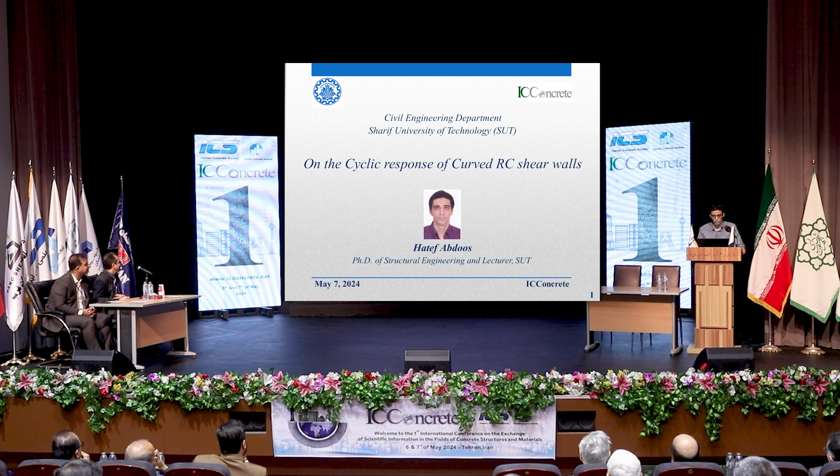Hello everyone, I am Hatef Abdoos, PhD and lecturer at the Civil Engineering Department, Sharif University of Technology. It's my honor to share my findings and current research on curved RC shear walls.

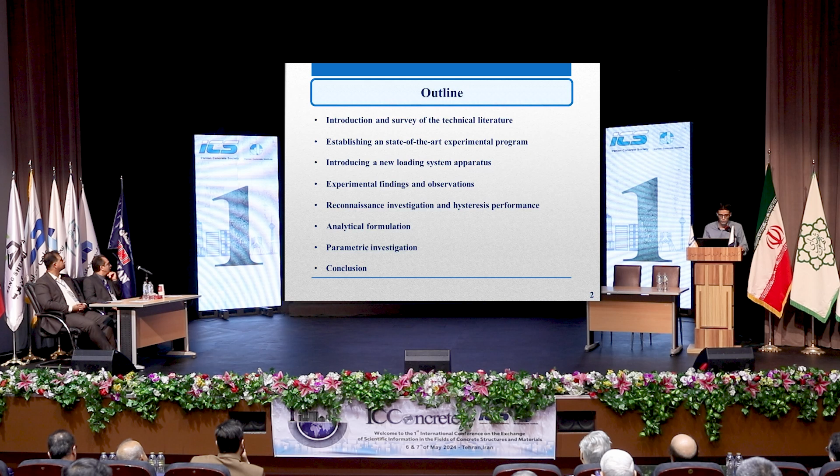The outline includes: first, a glance at the current technical literature; establishing a state-of-the-art experimental program to assess the cyclic response of curved RC shear walls; introducing a novel loading system apparatus capable of accommodating the in-plane and out-of-plane motion of the specimen; experimental findings and observations; a reconnaissance investigation on the damage evolution process and hysteresis performance of the tested curved RC shear wall; analytical formulation and parametric investigation; and conclusion.

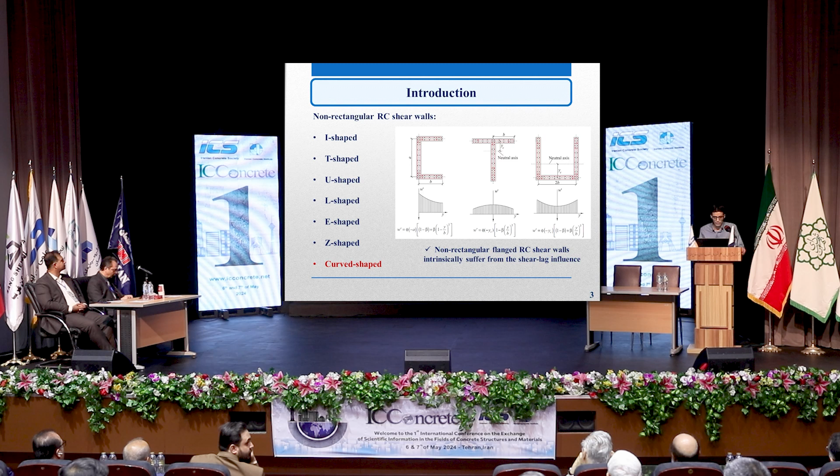Non-rectangular RC shear walls can generally be cataloged as I, T, U, L, E, and Z-shaped structures. This type of structure intrinsically suffers from the shear lag influence, and by adopting a curved shape and eliminating the web-flange intersection, the shear lag effect will not be a major concern.

In design practice, curved structural elements are generally employed to fulfill some of the architectural and aesthetic requirements. However, due to the complexity existing in the construction, casting, and testing process of curved structural elements, the structural behavior of such elements remains essentially unknown.

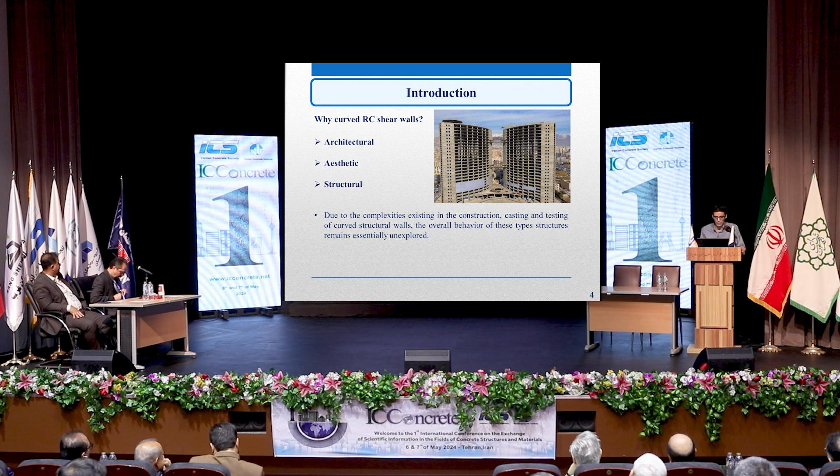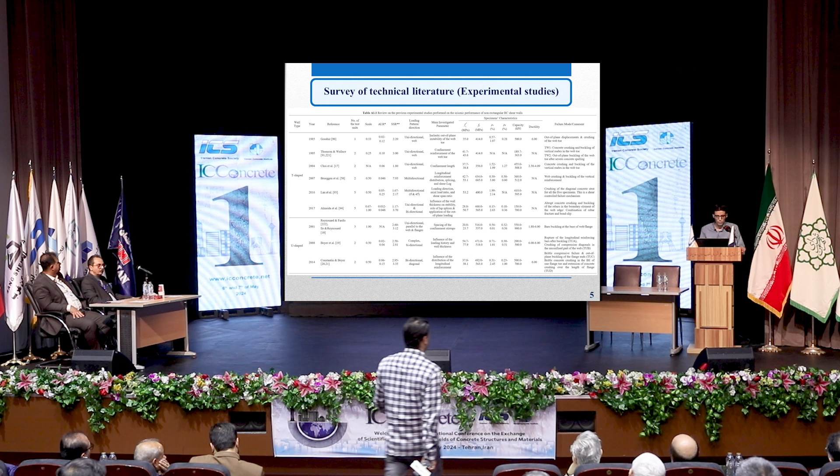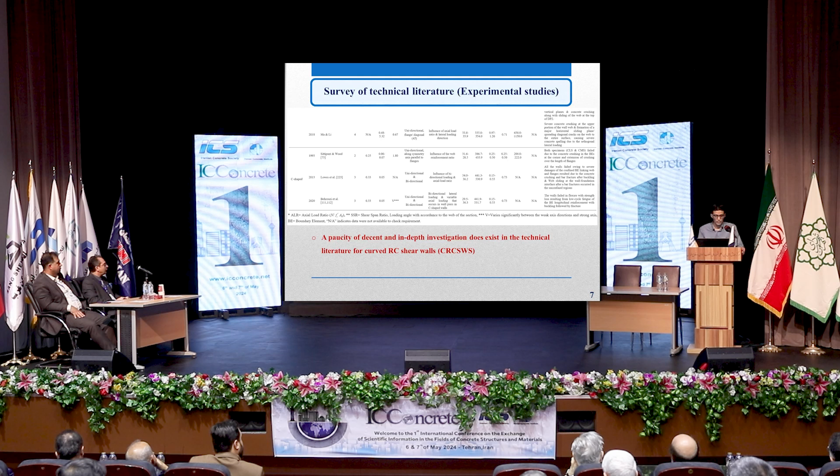A glance at the current technical literature indicates a wealth of experimental, analytical, and numerical investigations on the cyclic response of non-rectangular RC shear walls. However, a paucity of decent and in-depth investigation obviously exists in the technical research to assess the cyclic and structural performance of curved RC shear walls.

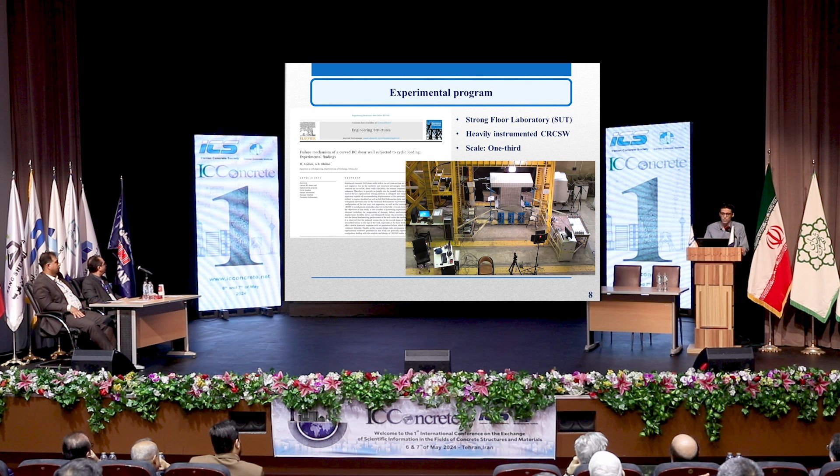In this regard, an experimental testing program has been designed and constructed at Sharif University of Technology. A heavily instrumented curved RC shear wall at 1/3 scale has been designed, constructed, and pseudo-statically tested under cyclic loading. The main assumptions made in the experimental study include no axial loading, no boundary element, and applying the lateral loading to the centroid of the cross-section.

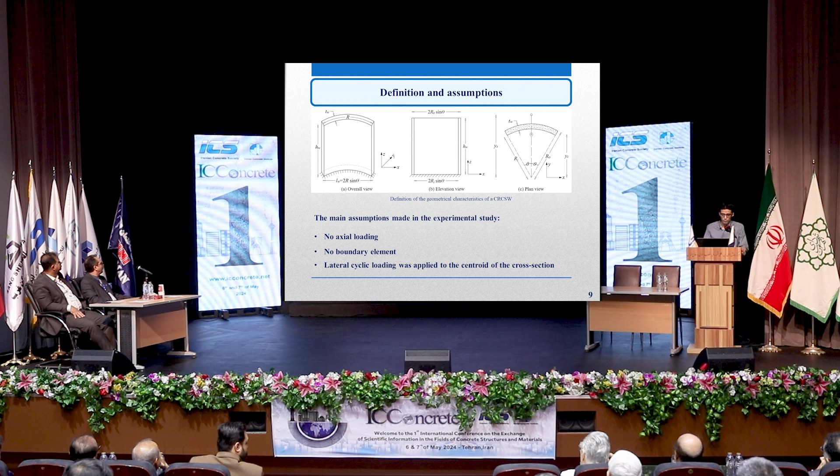As shown in the plan view of the curved cross-section, an offset exists between the shear center and centroid of the section. Hence, a torsional moment will be introduced in the section that should be considered in the loading apparatus system.

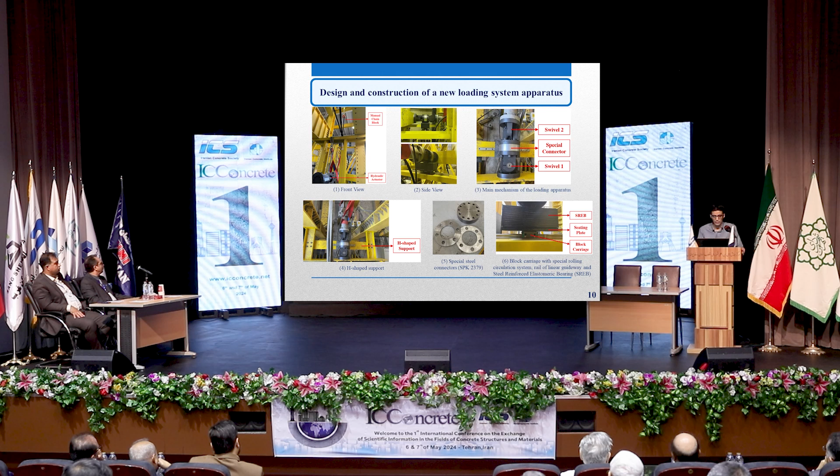In order to accommodate the out-of-plane motion of the specimen, a new loading system apparatus has been designed. The main mechanism of the loading system includes two interconnected swivels connected through special connectors, rested on steel-reinforced elastomeric bearings, which include a block carriage with a special rolling system and a linear guideway to freely move in order to provide out-of-plane motion.

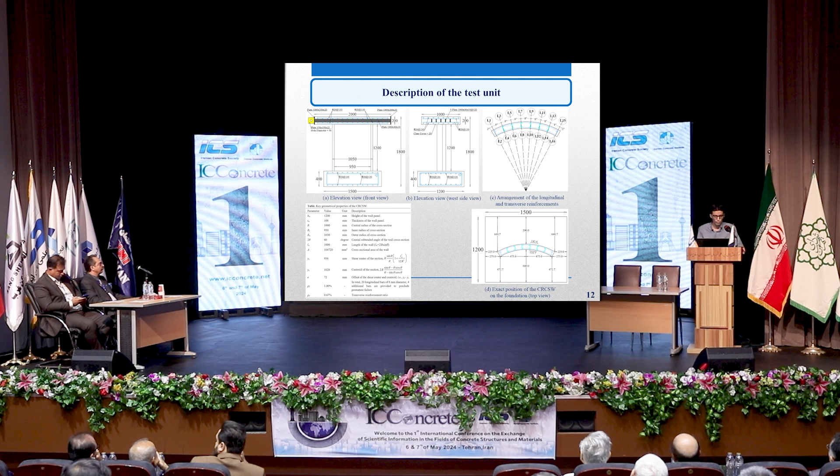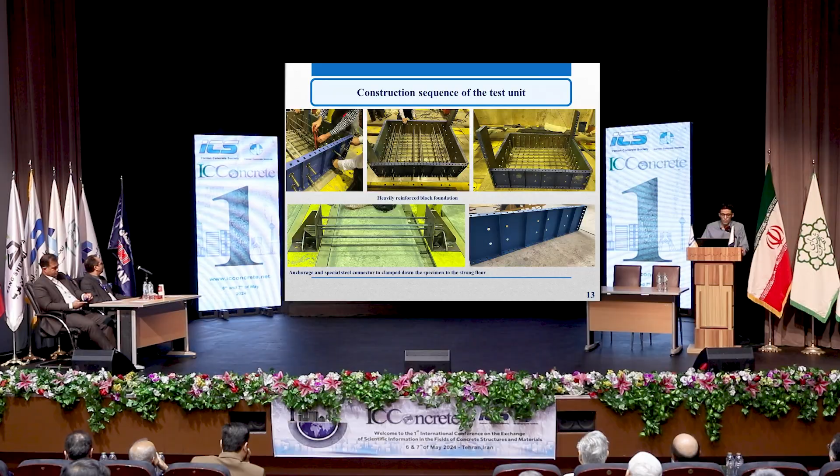The construction sequence of the test unit is provided in the following slide: a heavily reinforced block foundation, anchorage, and a special connector are considered to clamp down the specimen to the strong floor.

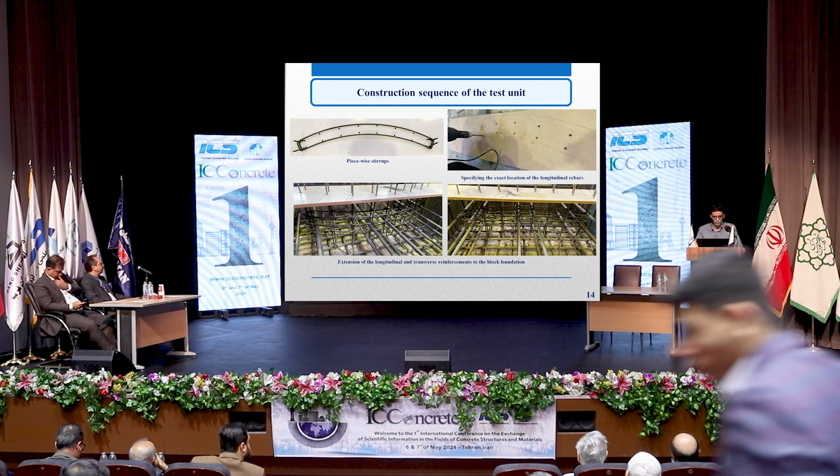The exact location of the longitudinal rebar is specified, and at the first place, piecewise stirrups are used due to the spatial cross-section of the section. Extension of the longitudinal and transverse reinforcement to the block foundation, piecewise formwork, cross sizing, and accurate leveling of the inner and outer formwork.

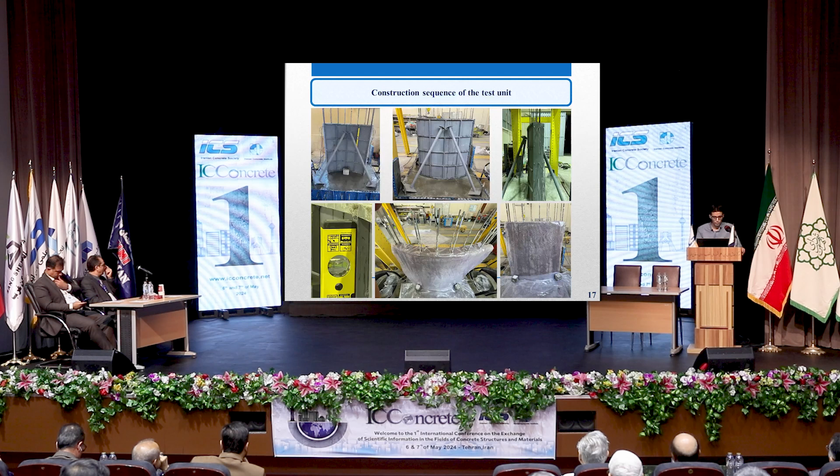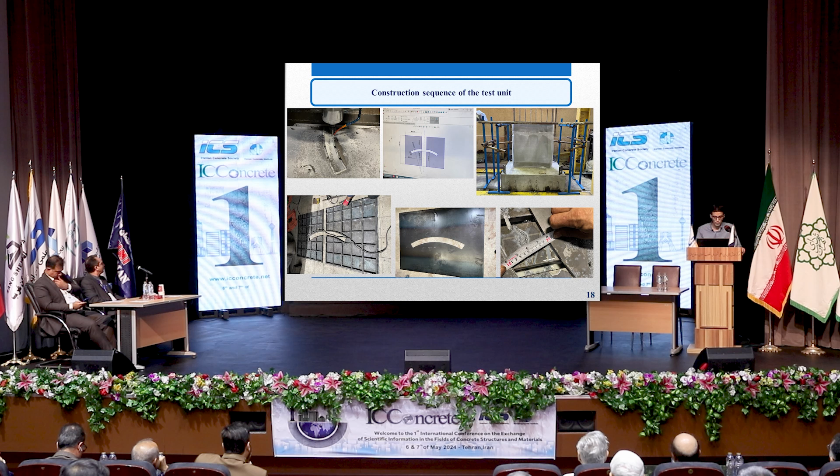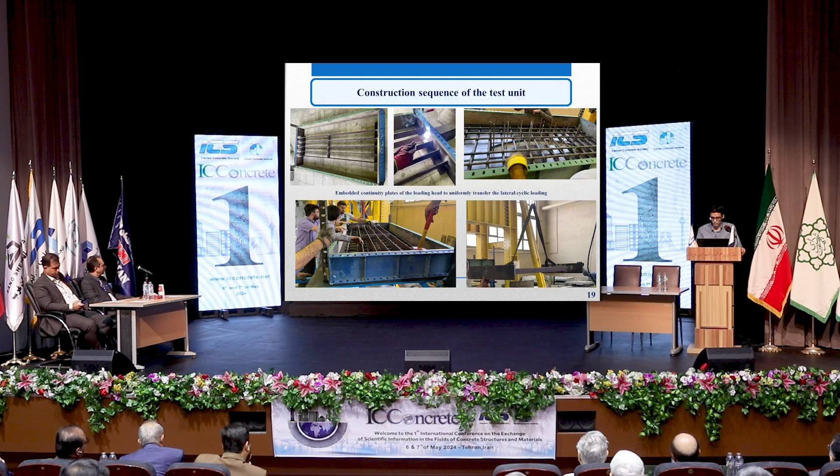Formwork of the wall panel, pouring concrete and curing of the wall panel. A CNC machine is used to accurately specify the exact location of the wall section on the formwork of the loading head. Five continuity plates are employed in order to uniformly transfer the applied cyclic loading. This is the final stage of the construction.

The mechanical properties of the material were considered using the UTM test. As the thickness of the wall cross-section was essentially small, that is 10 centimeters, a self-compacting concrete with target strength of 45 megapascals was employed, and the J-ring test of the self-compacting concrete is shown in this slide.

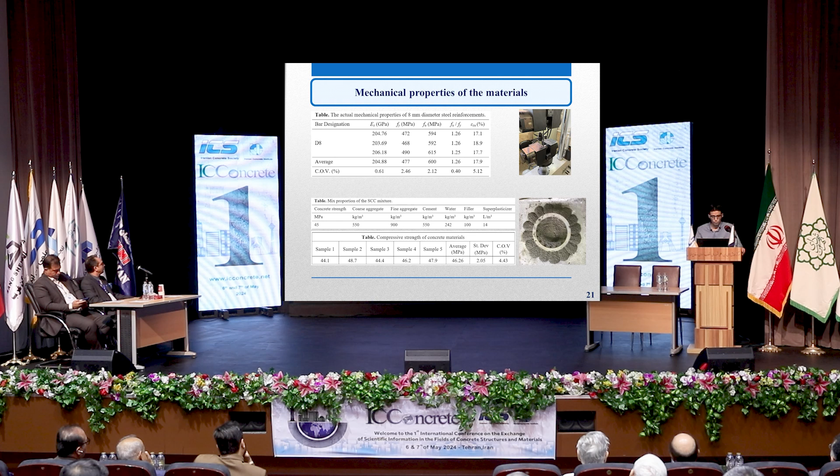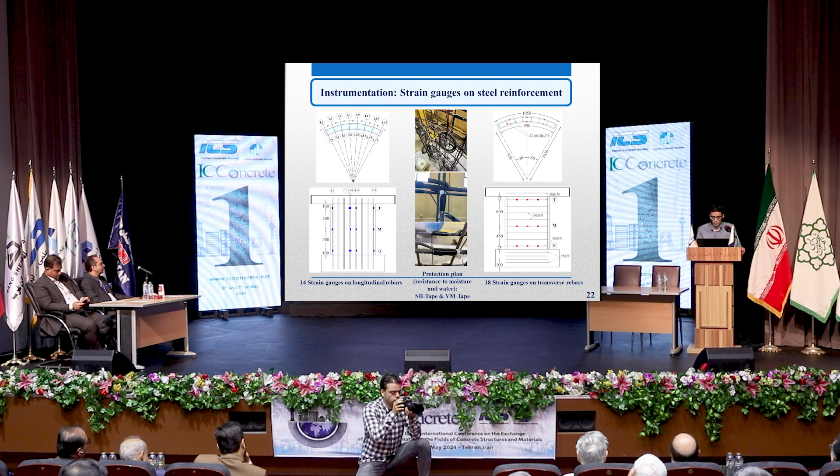14 strain gauges have been affixed to the vertical reinforcement and 18 transverse reinforcement. A special protection plan using SB tape and VM tape has been employed in order to protect the embedded strain gauges, and no malfunction or failure was detected during the testing process.

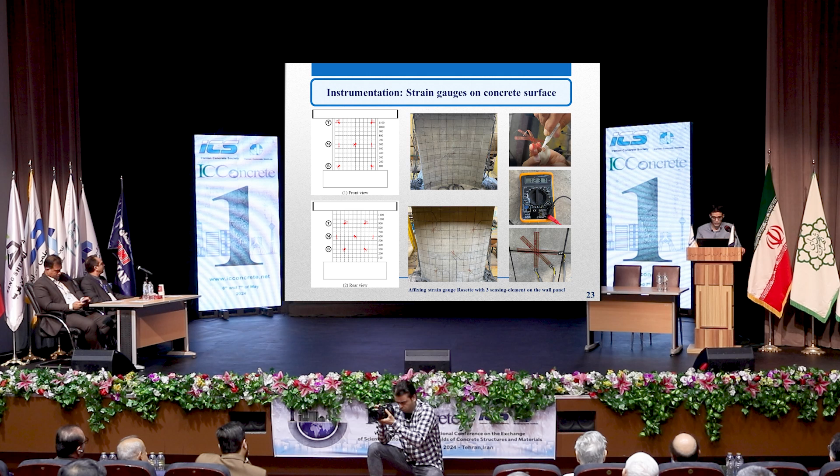10 strain gauge rosettes with 3 sensing elements have been affixed to the wall panel at both faces in order to detect the strain profile for the wall panel. 9 LVDTs have been employed in order to capture the in-plane and out-of-plane motion of the test specimen. 7 high-resolution cameras have been employed in order to thoroughly capture all the details during the testing process.

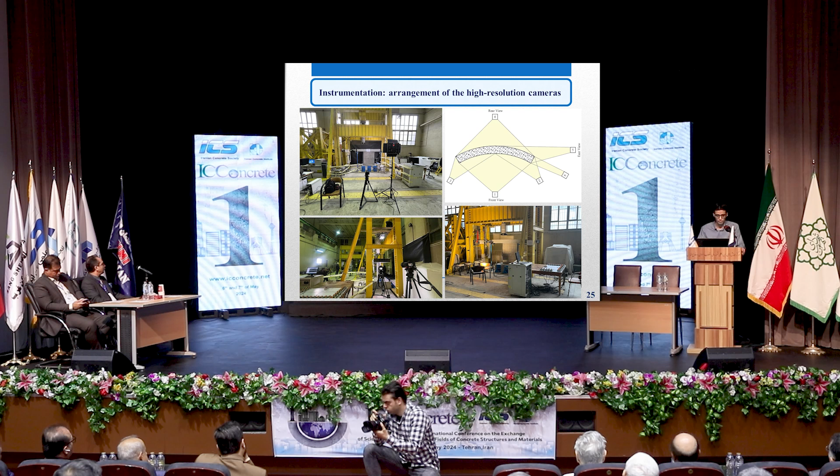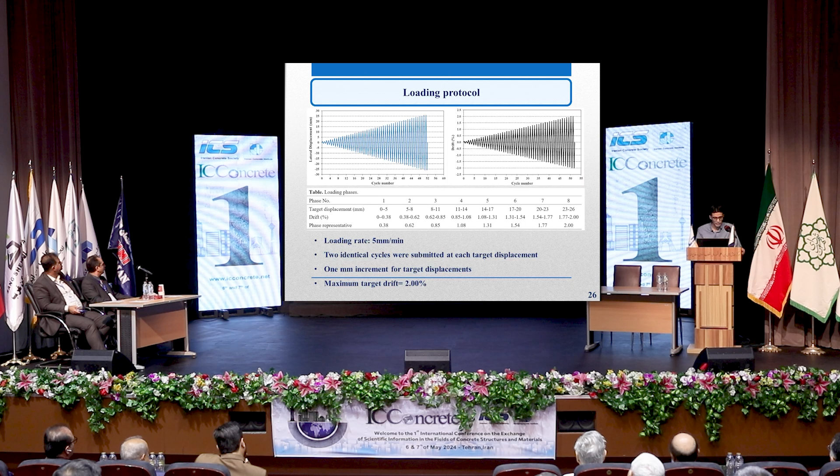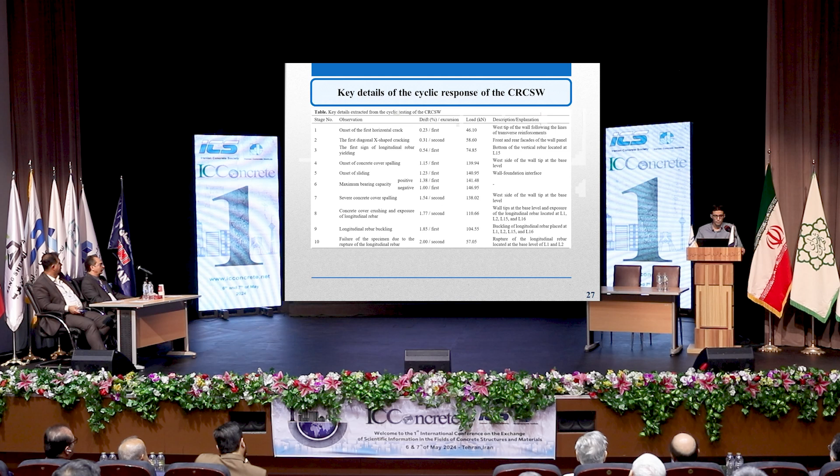During the testing, 10 key stages were extracted from the cyclic response of the tested curved RC shear wall. The performance level of the tested wall is shown in this figure.

At the first stage, at the initial phase of loading, horizontal cracking due to the combined action of bending moment and warping torsion developed and formed in the wall panel. By increasing the loading excursion, diagonal X-shaped cracking formed and developed across the wall panel at both the inner and outer faces.

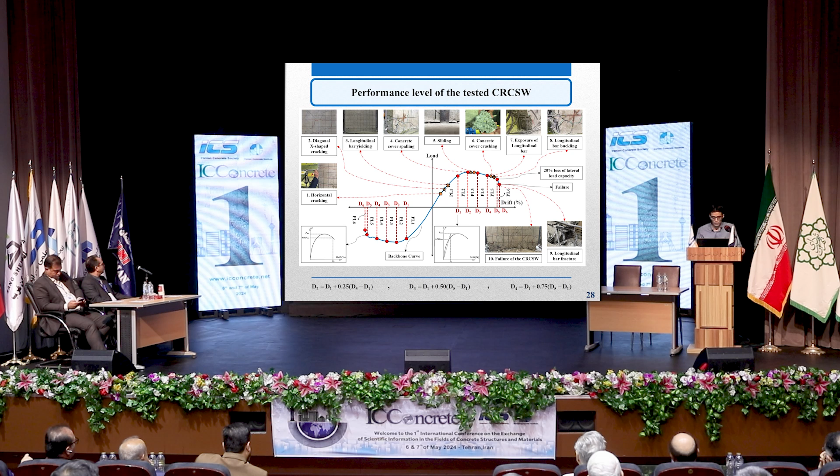Yielding of the longitudinal rebar, concrete cover spalling, sliding at the interface of the foundation and the wall, concrete cover spalling and internal exposure of the longitudinal rebar, buckling of the longitudinal rebar and fracture of the longitudinal rebar at the outermost layer, and at last, failure of the specimen at the final excursion of 2% drift.

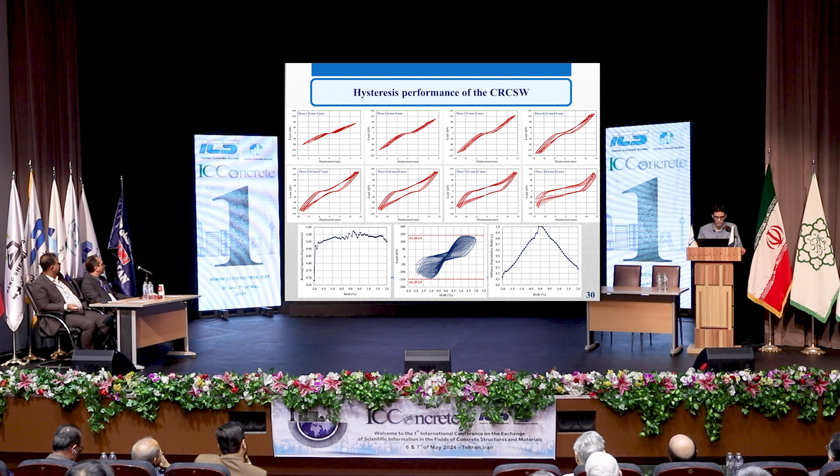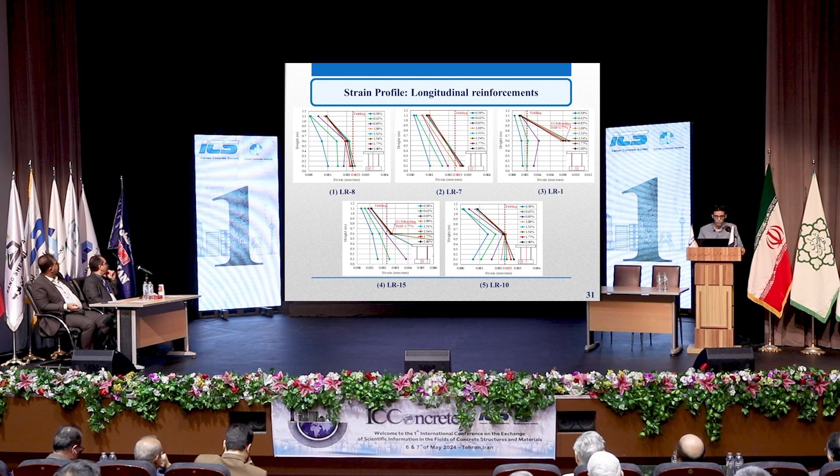In order to assess the contribution of the longitudinal and transverse reinforcement, the strain profile has been derived. Almost all the longitudinal rebar has yielded, especially at the base level of the wall, with a general decreasing effect observed along the height of the wall.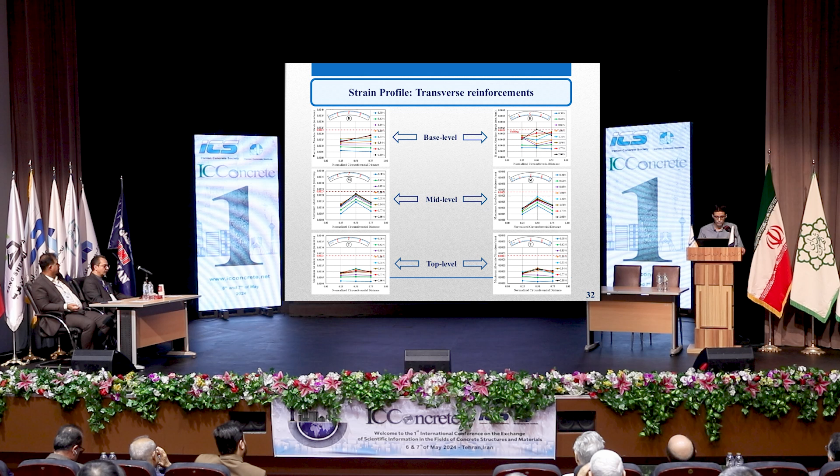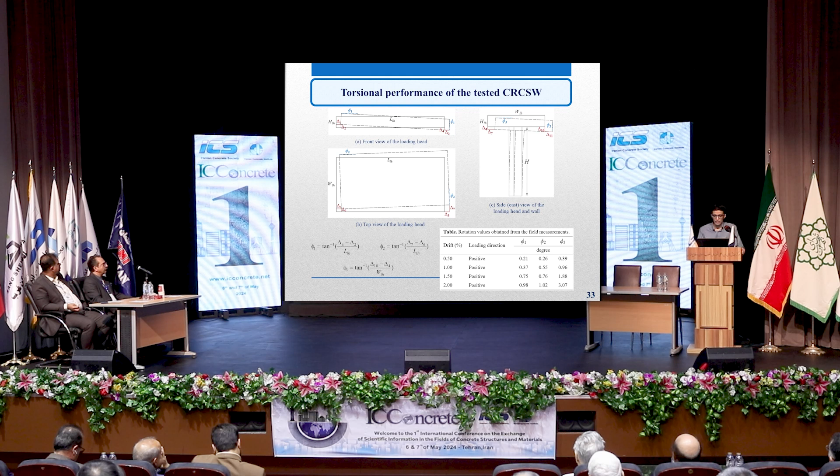In order to assess the torsional performance of the tested wall, the LVDT measurement and image processing data have been utilized, and the results indicate a significant out-of-plane response of the wall, signifying the torsional performance and out-of-plane motion of the tested wall.

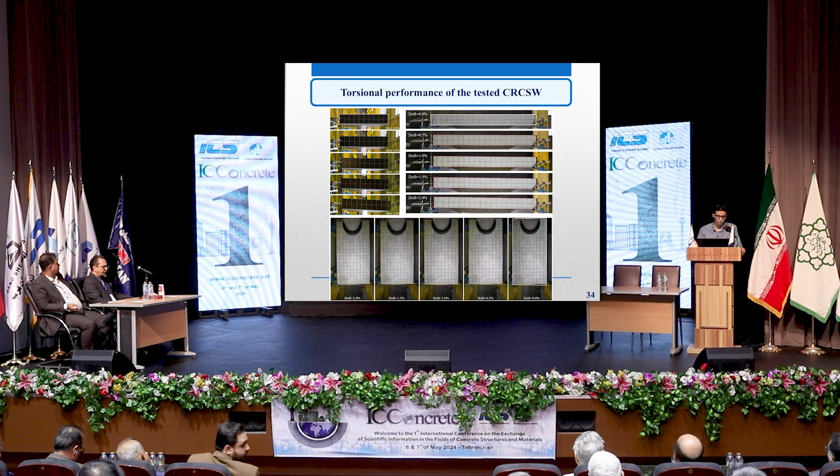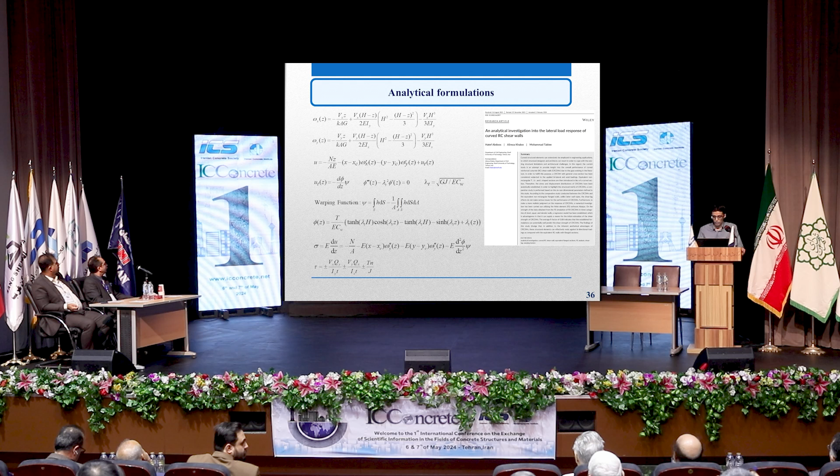Within the analytical formulation, we derive analytical expressions for the stress and strain development of non-rectangular, flanged, and curved RC shear walls.

Equivalent non-rectangular flanged sections are introduced based on the material efficiency criterion.

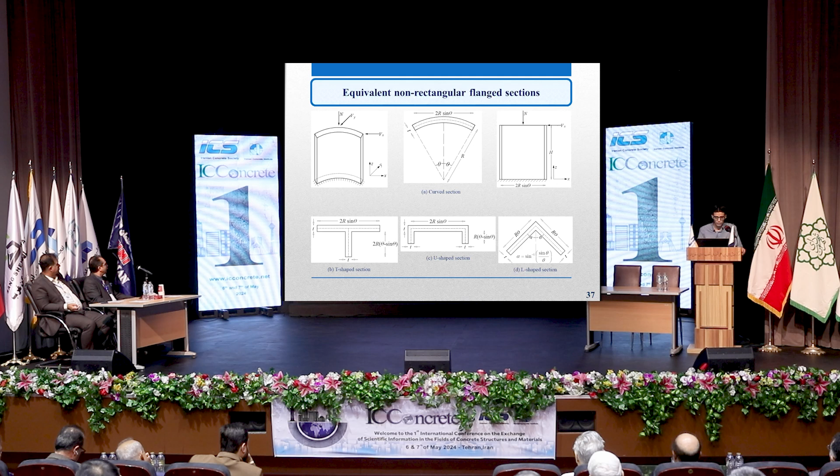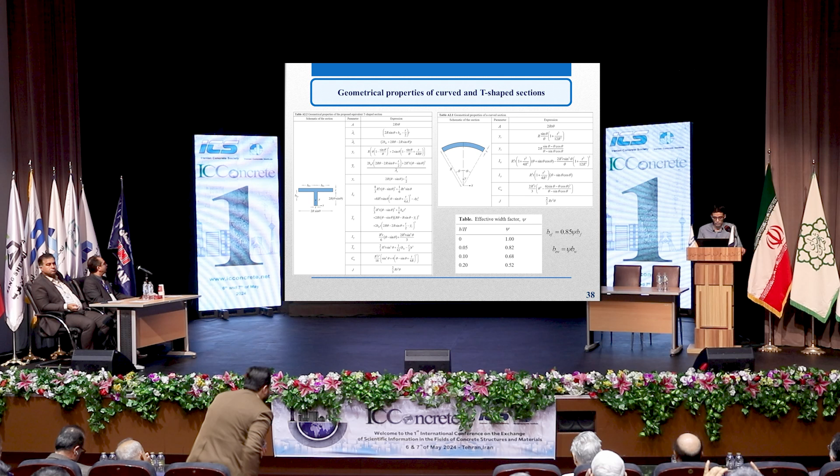All the geometrical properties used within the analytical formulation are derived for a general section for curved, T-shaped, L-shaped, and U-shaped RC shear walls, in order to compare the structural performance of the curved RC shear wall and those of equivalent sections.

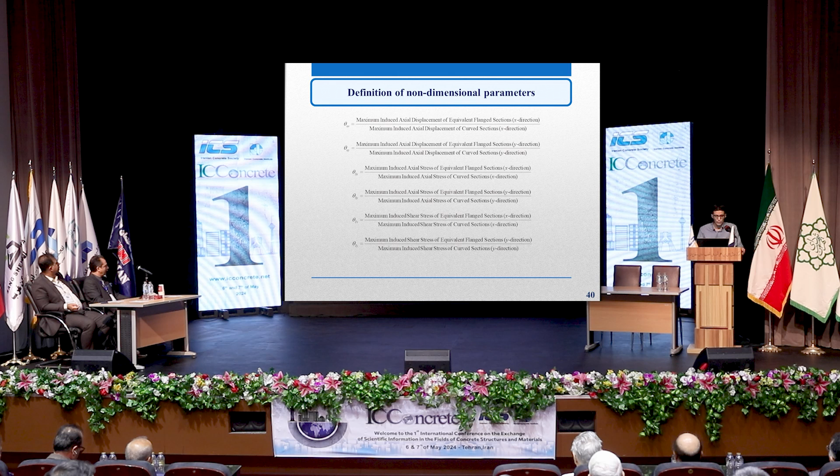Six non-dimensional parameters are introduced to assess the induced response of the equivalent flanged RC shear wall with respect to the curved RC shear walls.

The results are computed for 6 different RC shear walls with their equivalent cross sections. The results indicate the superior performance of the curved RC shear wall in comparison with its equivalent cross sections.

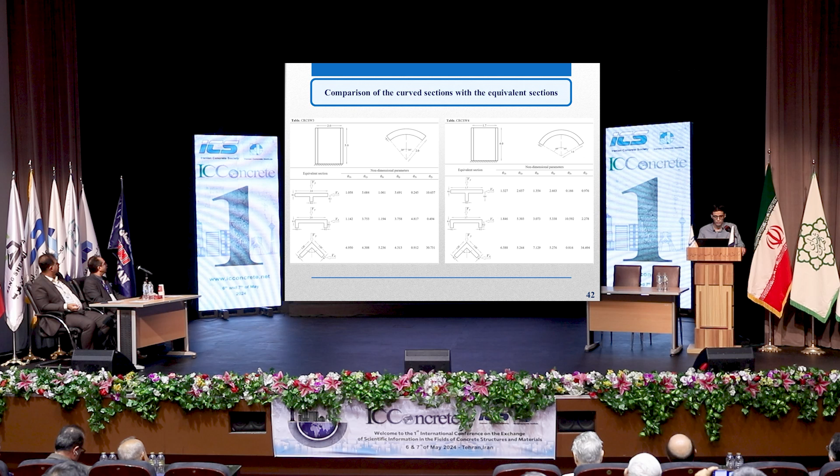Within the parametric investigation study, 90 curved RC shear walls have been simulated in the Abaqus software for 3 categories: short, squat, and slender RC shear walls.

An applicable formulation has been proposed based on the ACI approach for the shear strength estimation of the curved RC shear wall. The main parameters include 9 parameters that were employed based on the sensitivity analysis.

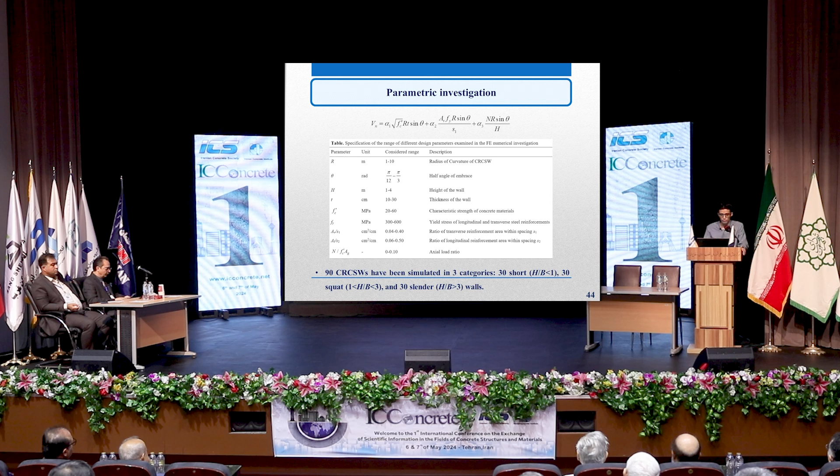Based on the regression analysis, coefficients of alpha 1, alpha 2, alpha 3, and the R factor have been defined.

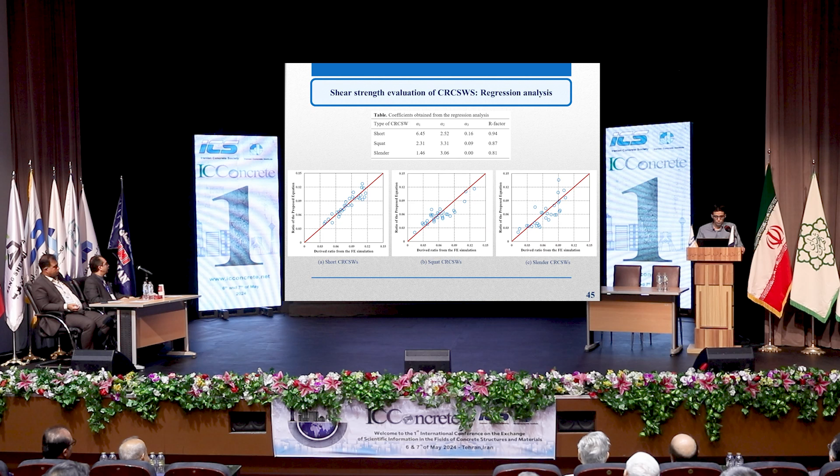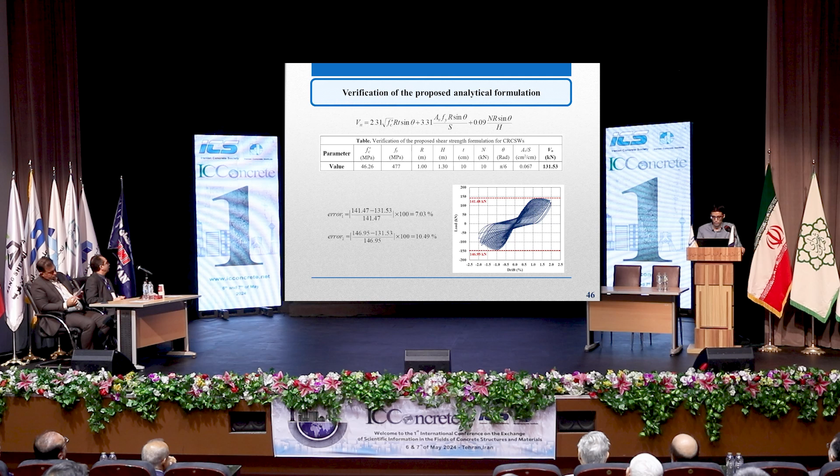In order to further verify the accuracy of the proposed analytical formulation, the results of experiments based on actual mechanical and geometrical properties have been considered. The results indicate that the proposed formulation can well predict the shear capacity and response of the curved RC shear wall with less than 10% error.

Conclusion: the structural performance of curved RC shear wall has been assessed within the experimental, analytical, and numerical investigation.

The tested curved RC shear wall indicated a stable cyclic performance with no discernible strength and stiffness degradation. The induced warping torsion due to the eccentricity of the shear center and centroid of the section was largely responsible for the governing failure mode of the curved RC shear wall.

Due to this failure mode, special care should be given to adopting a well-designed boundary element.

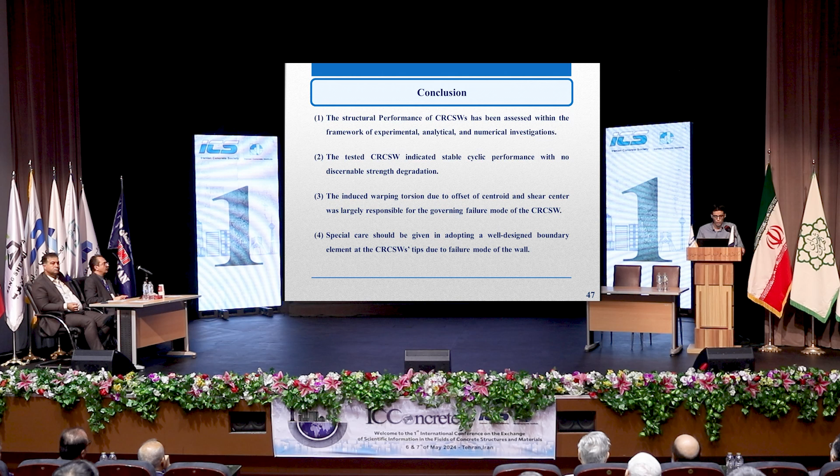The contribution of the longitudinal bar was more significant compared to that of the transverse reinforcement, owing to the shear span ratio of the wall, which is 1.3.

The proposed analytical formulation was capable of well predicting the shear strength capacity of the wall. The findings of this research revealed that the curved RC shear wall can potentially be a well-deserved substitute for the conventional flange RC shear wall.

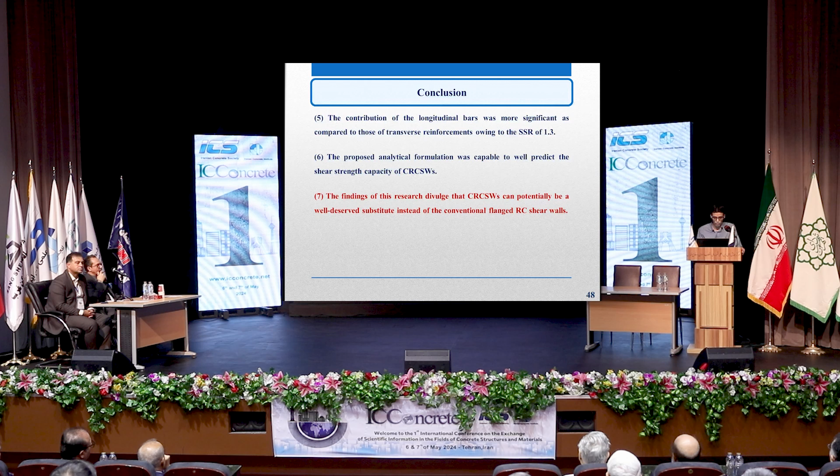Interested researchers can consult our current research on curved and flange RC shear walls.

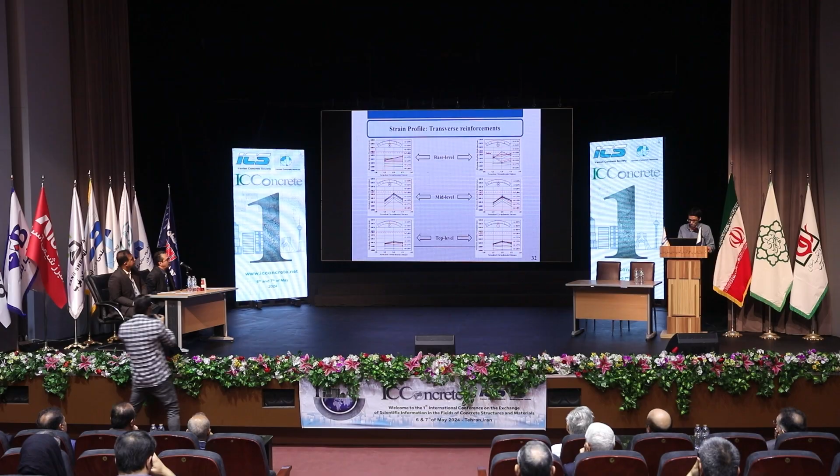In non-rectangular RC shear walls, the current research conducted in this field has focused on capturing all details during the testing process. In this regard, the increment has been considered 1 millimeter per second in order to thoroughly capture all the details during testing. This loading protocol has been considered common for non-rectangular RC shear walls in the simulation process.

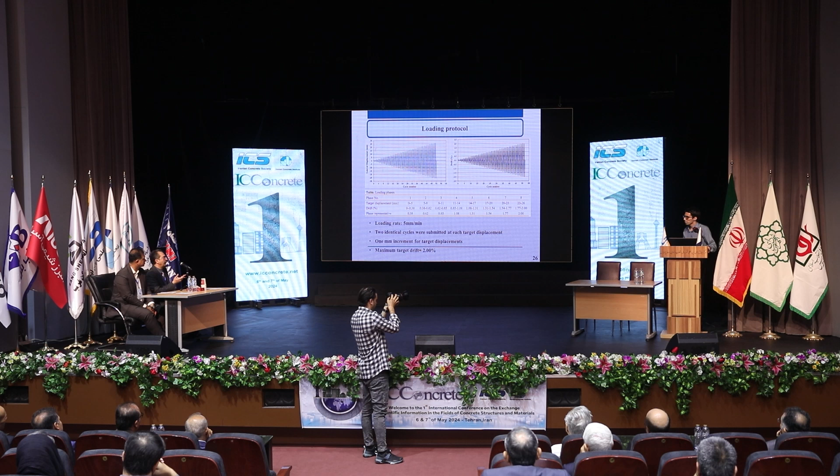Sure. In a dynamical structure, when you apply a load, when you shock the structure, it takes time to respond. If the frequency of the structure is smaller than your shock, the structure needs time to respond. So when we keep the amplitude the same for a couple of cycles, we give the structure a little time to show what happened. Of course, when analyzing the whole thing, you're pressing the structure a bit too much, but you still get the result. Thank you, thank you so much.